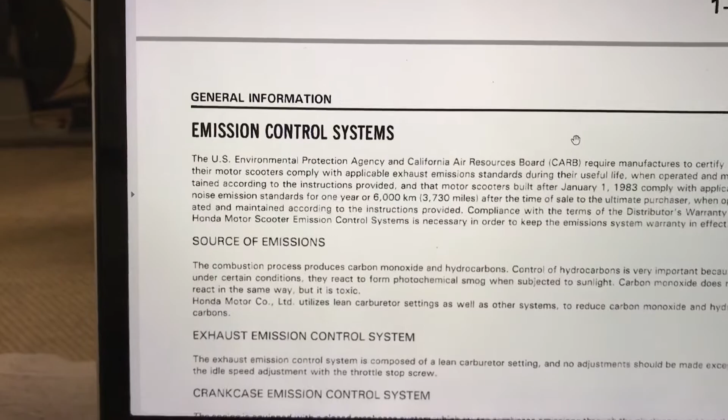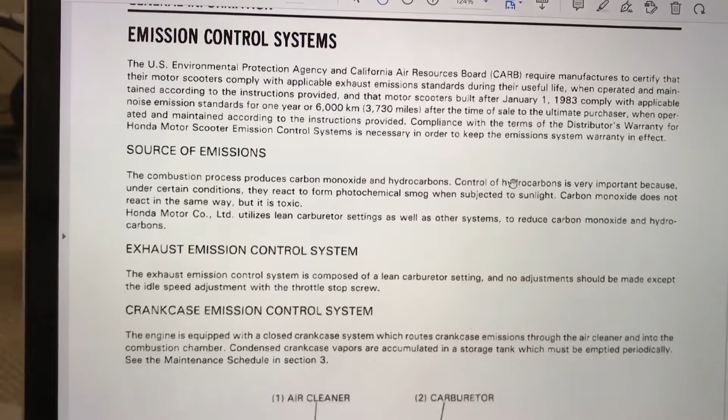This is the service manual. You can Google this, and I was able to get this for free online. CH150 service manual, and I just saved the whole thing because even if you don't know what you're doing, it's good to have. You can always share it with somebody.

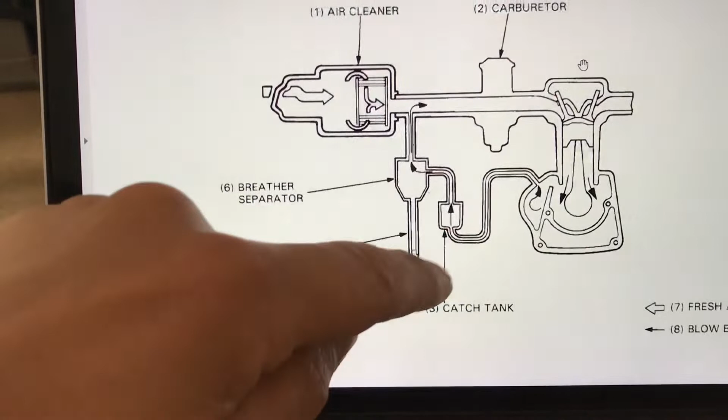So this is basically your system. I don't know if this is going to help, but this is your air cleaner. Goes with your carburetor, your engine, and this maybe is what they're talking about too, this crankcase ventilation. So that's the engine. You have hoses coming out.

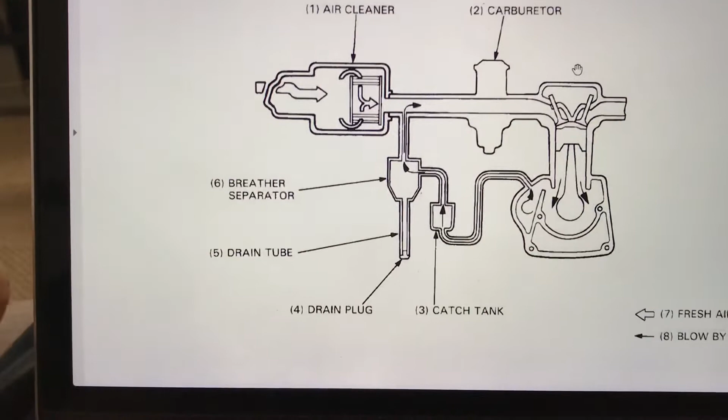It goes to a catch can, which basically separates oil from vapors, and it's recycled back into the engine. This hangs down, this piece here, by the kickstand I believe, and that's a breather separator. That's also separating oil and crankcase ventilation, basically.

It's all emissions, you know, you can't be dumping. Years ago this would go right to the road. In the 30s and 40s, cars just dump oil into the road. So now we gotta recycle that. We can't have any, especially on motorcycles. You don't want anybody crashing.

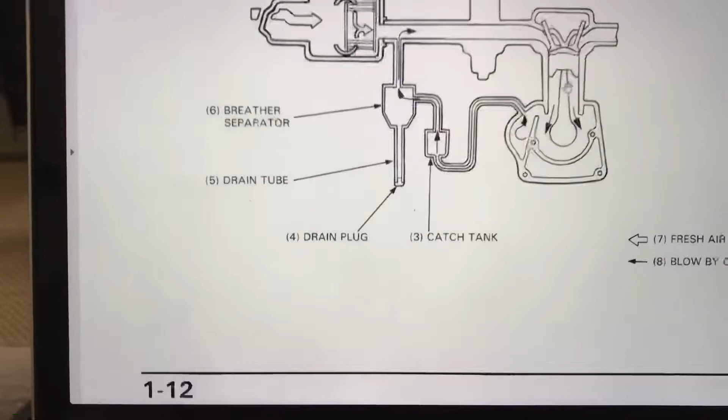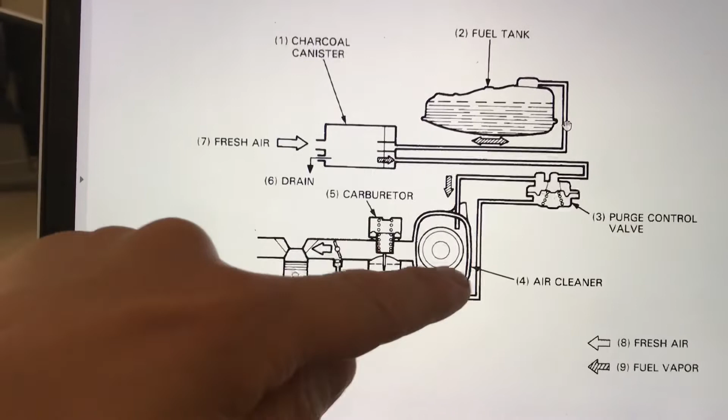So that's probably not what people wanted to know. They wanted to know more about the fuel tank, and we're getting there, bear with me. Carburetor, air cleaner, there's a purge valve, a charcoal canister, and a fuel tank.

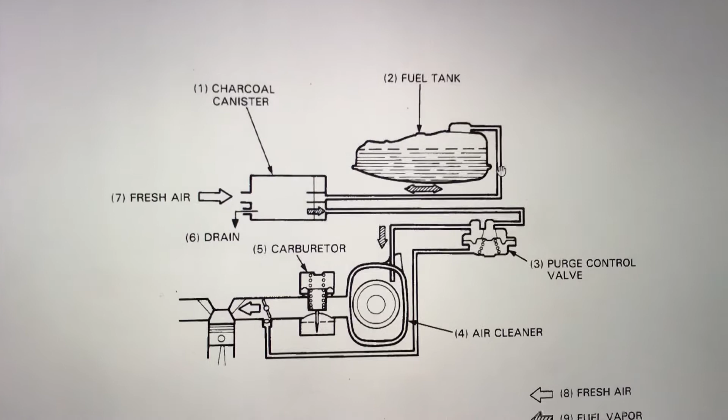Again, this is all for emissions. I think this covers all models, not even everything across the country.

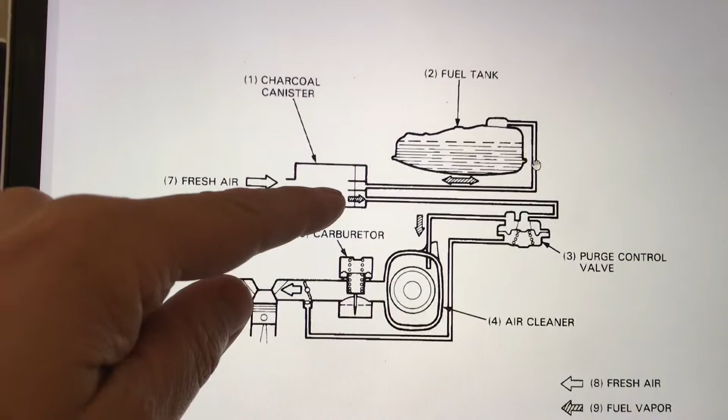Every car has a charcoal canister, and what that does is the top of the tank, fuel vapors come out, go into that charcoal, absorbs fumes. That's the beauty of charcoal, and it is recycled back through this valve, which a purge valve is basically - it opens on demand and it goes back into the engine. So it's basically recycling of vapors and fuel.

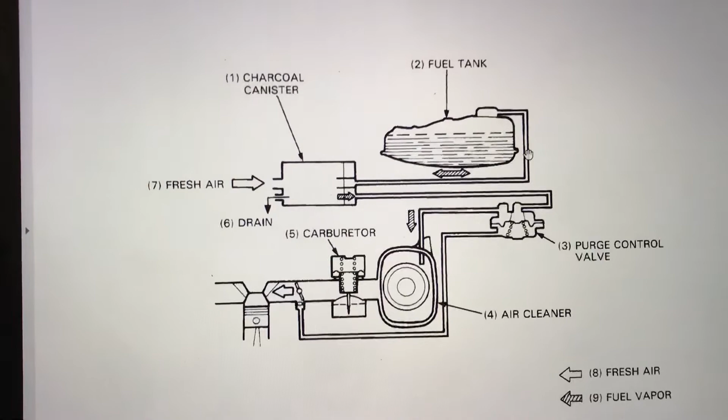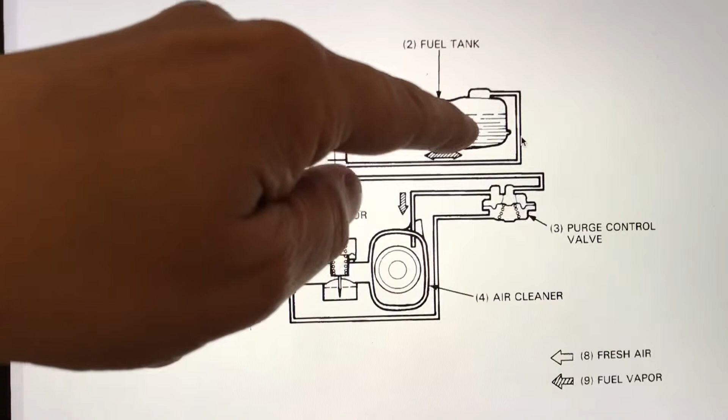And they're showing the engine down here. This also has a drain on it, probably for excessive fuel. I'm guessing that dumps in the street, but it probably never - that's just something's, probably if there's a problem. Regardless, so yeah, purge valve, there's a little valve. I think it's mounted next to the tank, if I remember right.

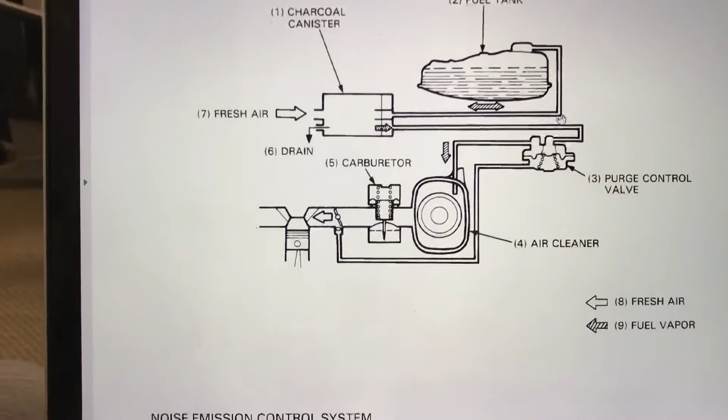And then there's a vacuum hose to that, so the air cleaner, vacuum hose to the air intake. So that's providing vacuum to open that valve. But again, there's nothing off the carburetor yet, which is what people keep asking me. So let's get into California emissions.

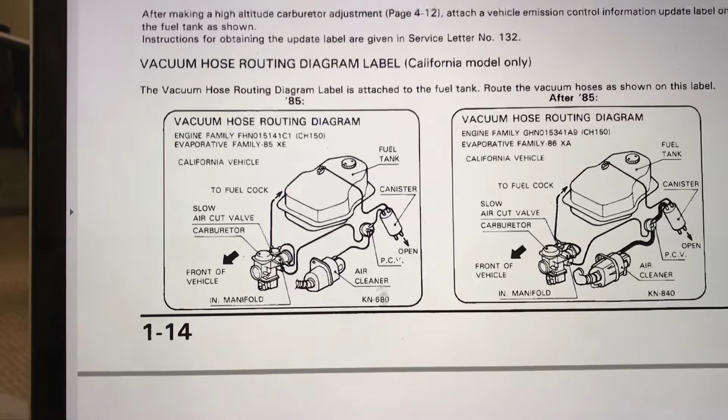Emission label, it's on the gas tank. So here's what I got. I have an '85 and after '85. The only difference I see is they put a big thick PCV hose, and that stands for purge control valve.

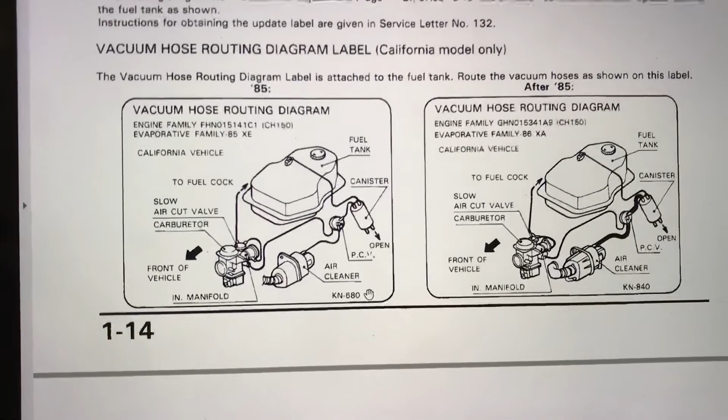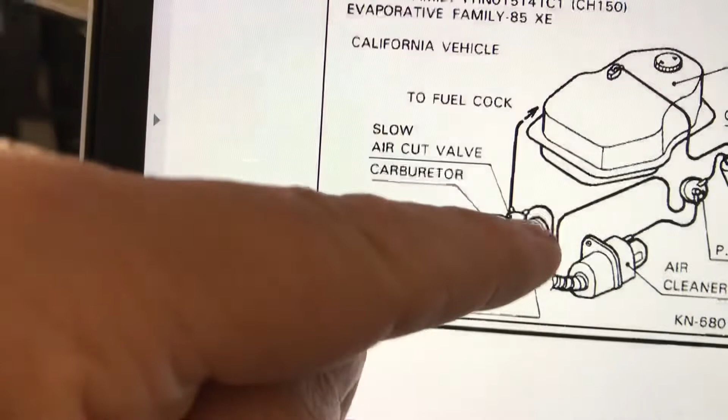So again, emissions. So the only thing I see that confuses people is down here on the carburetor. So you have, this is your inlet, fuel petcock. Again, it's not showing where on the carburetor it goes, but it's on that passenger side because this is the front. And the only other is a vacuum.

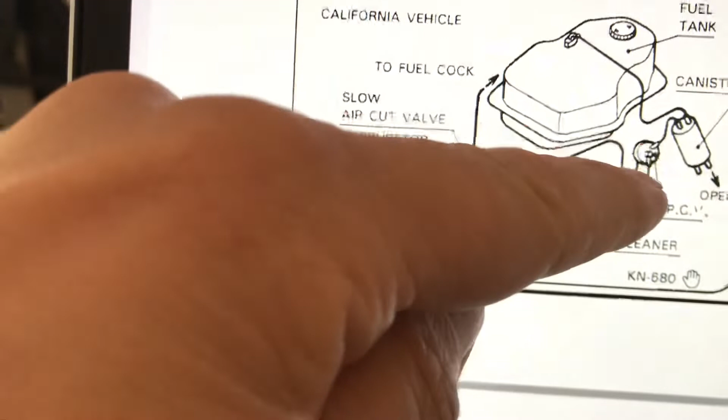Anything that's in a snorkel like that, it's providing suction vacuum. So that's a vacuum to open up that valve. And that's another - that's that PCV, positive crankcase ventilation. Is that the one we looked at in the other picture? That might be the one we were looking at in the other picture.

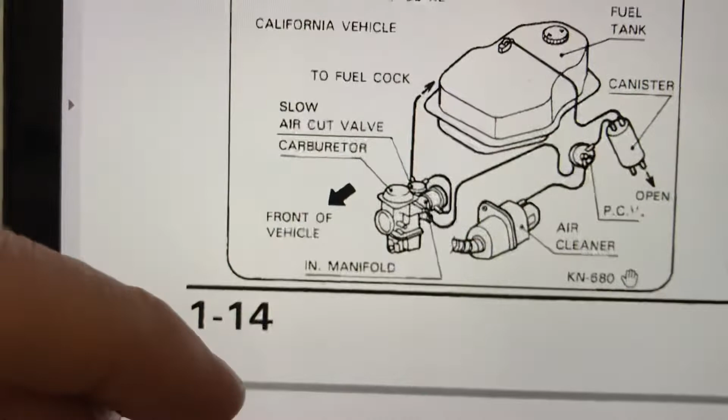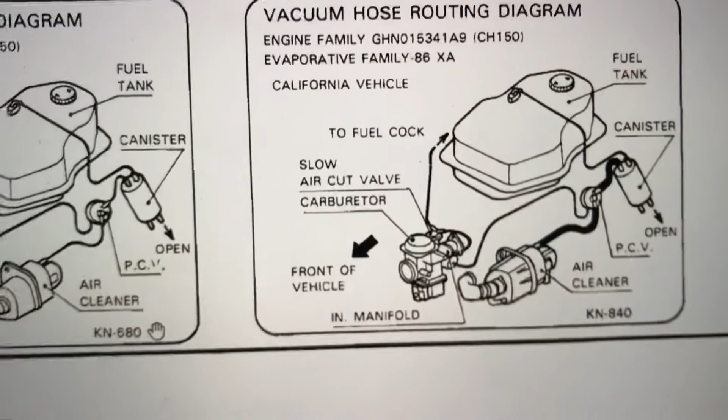And then, so there's only 1, 2 - there might be another vacuum hose. Let's go over to the... Yeah, there may be another vacuum hose without getting out there and looking at it, but...

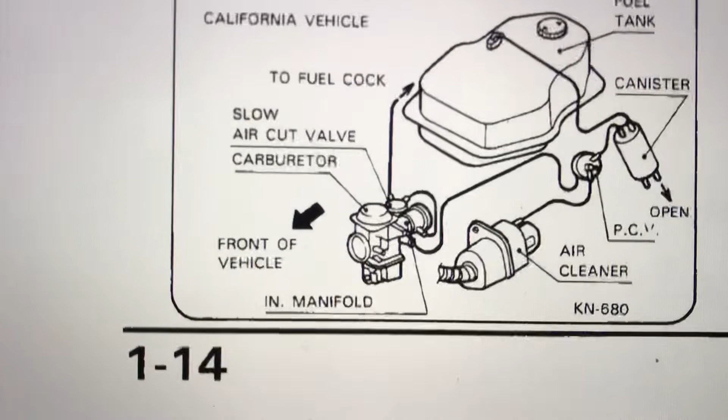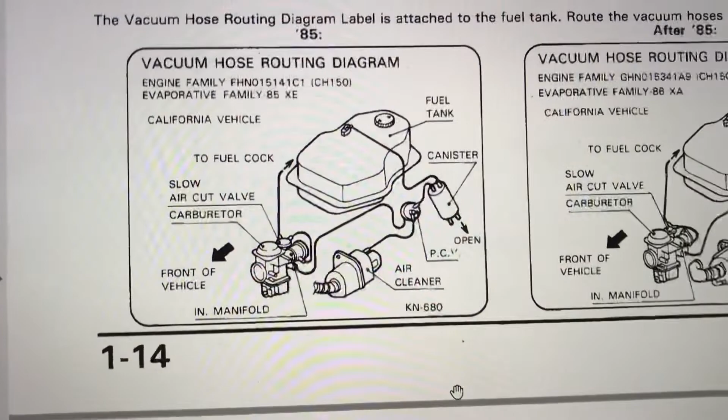That's basically it, really. I'm getting into the oiling system, yeah. So I don't know, you guys keep asking me about all those hoses, and there's not really a lot of hoses on mine. California should have more than anybody else, because I don't think anyone else would have any of this stuff. California's pretty strict on emissions.

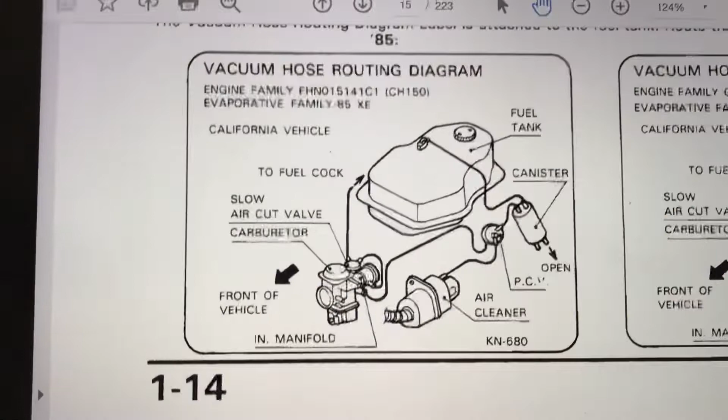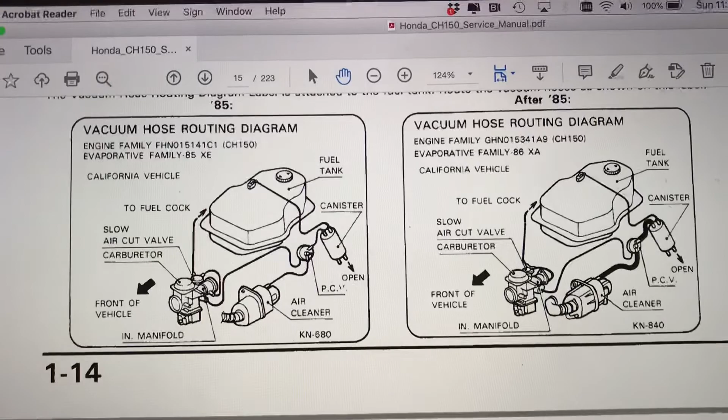What I'm going to do is get all the panels off for you guys, and I've done videos on that, but there's a bolt here, a nut here, a bolt here, a bolt back here, take the bumper off, blah blah blah. I'm going to take off both sides so we can get right in there.

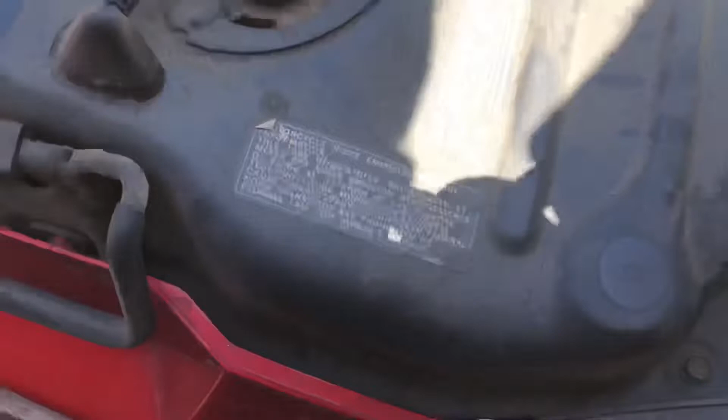I'm guessing mine doesn't say, oh yeah, probably says over here, California emissions. That's all the issues that I think questions are on, because I have all this extra stuff on mine, being California, which is the new norm for everything. Well, I might as well start from scratch, because nobody wants to go back and watch videos.

First screw, right here, bam. Just one with the washer on it. There's 2 Phillips up here. Let me find my screwdriver. One on each side, one here and one on the other side. And that's for this front piece, which, yeah, you do have to take it off. Sometimes I take the seat right off too.

So that's going to be those. Behind here is just clips. You in frame? You're in frame. So let's get back there. This is where I think we only need a Phillips and a regular, really.

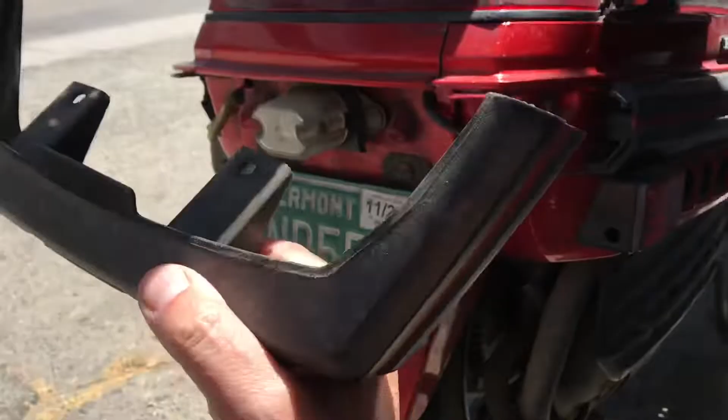Next up is the 2 Phillips, so we can take this bumper off. Then we need to get to a screw here. It pops off. And there's our other screw here.

It's like a 13 millimeter or a flathead screwdriver, I think is what it is. You put you back on the tripod. Alright, and then it should just come off. There's a little clip up underneath there like that. Same with these guys over here, you can see that.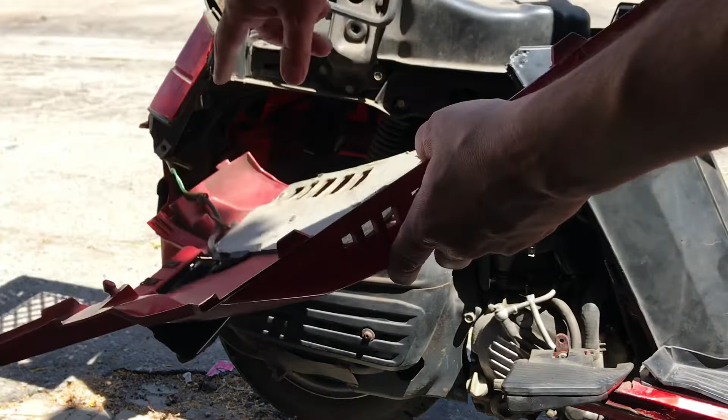Yeah, see, it's just these little tabs that hold it in. Back there you got your tail lights, or your turn signal. There you are, bullet connectors we call those. Okay, red and white. There's a cover.

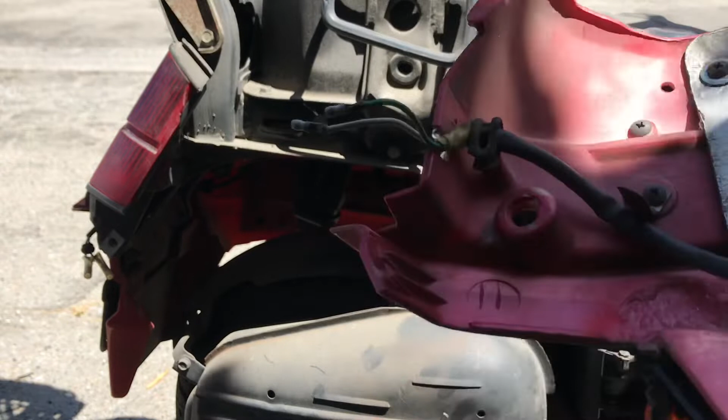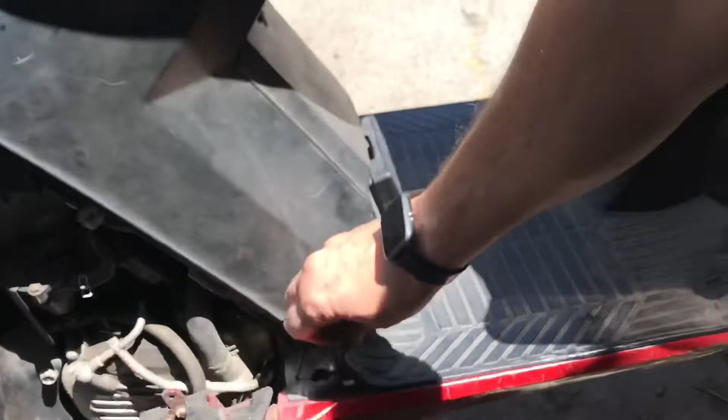We're getting in there to emissions and carburetor stuff, but we're going to get the rest of this off. There are 2 down the bottom here. I don't remember, does that have to come off? Yeah, I guess that 10 millimeter on each side, and that'll take this whole thing off.

Why? Because that's a cup holder. That's the best thing you can buy on Amazon. Get your coffee, not your beer. That would be illegal. I'm going to take these 2 seat bolts out too.

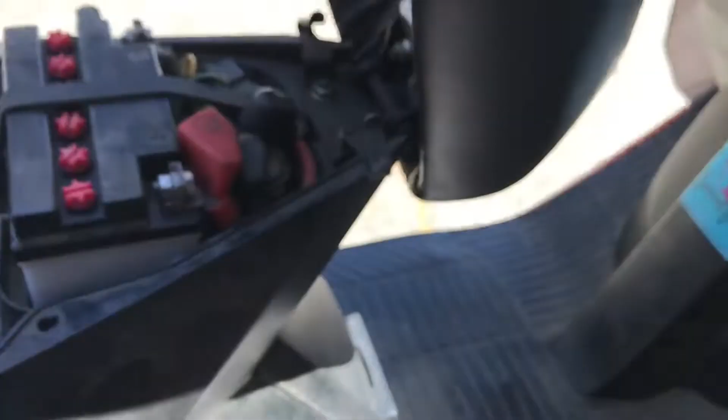Just, like I said, the seat is just in the way. There we go. Now look at all that room, a lot of room we got. Alright, that's going to come up. Off.

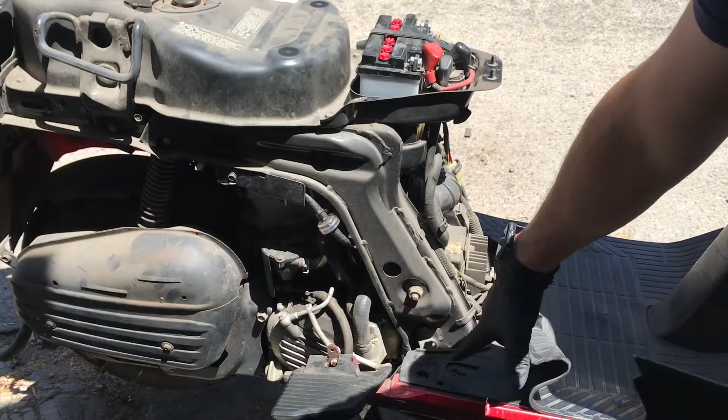Again, there's side panels that hook in there, 2 bolts at the bottom. I don't think that... no, that just curves around and something down there. We're getting there, she's almost stripped. Let's get to the other side.

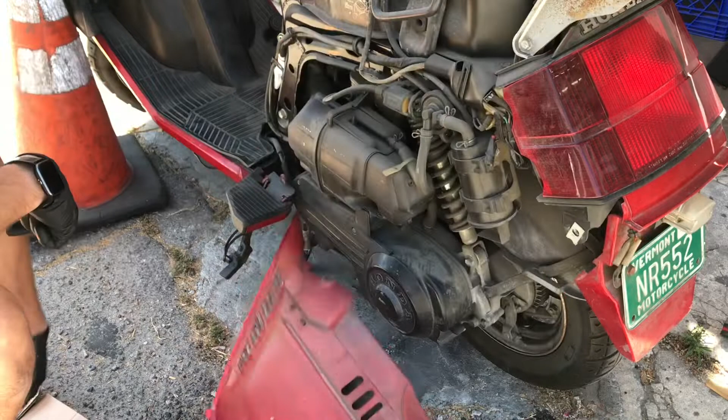And I should reiterate, when I say people always ask me, I mean you guys, and this is great. Thanks for asking about this stuff, because that shows the information is not out there, and I can gladly provide it. Because that's what the world should be about, sharing information. Google will tell you that, I think they share everything. Steal it, don't do that. Not till these break.

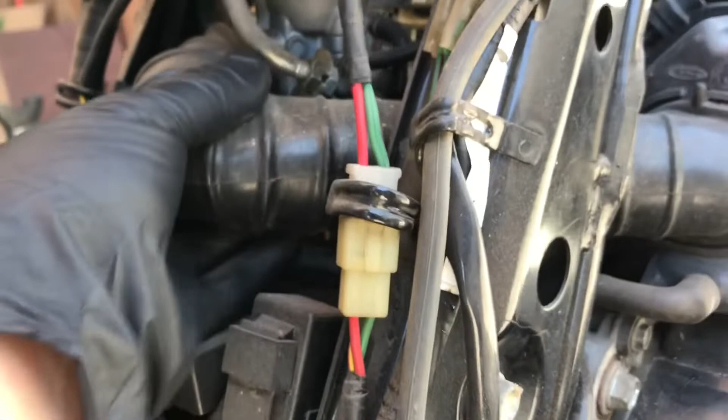Alright, she's looking stripped, right? Yeah, I mean that. Thanks guys, thanks for asking questions. And you know, I'm on my own time here providing this. I'm not getting paid, but that's what I'm here for. Aren't we all? So I guess, yeah, if you were a

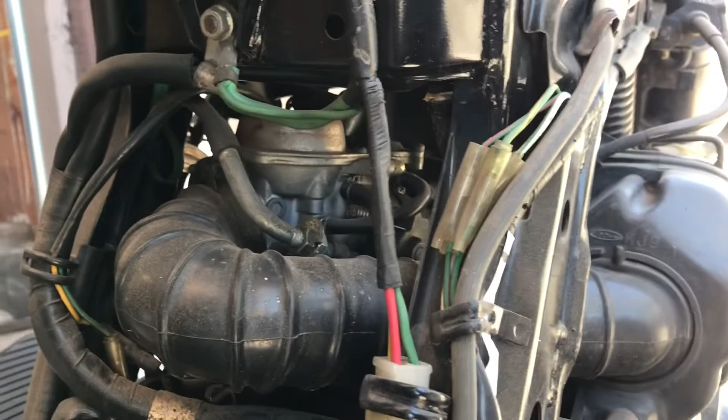novice, you would look in here and see all these hoses and say, what is all this crap? That is a good point. I'm going to take this off. That's our inlet. I'm going to really get in here. I want to really show you what we're looking at.

If you're going to own a scooter or carburetor, you really do need to know how to clean carburetors, because they always get dirty. The reason they always get dirty is because people leave gas in them. The worst thing you can do is leave gas in a carburetor, or not run it, you know, store it for the winter. You got to empty it. You can use fuel stabilizer, that stuff works great. But yeah, that's the biggest issue that happens with these things. And cars too, I mean, you gotta store things properly.

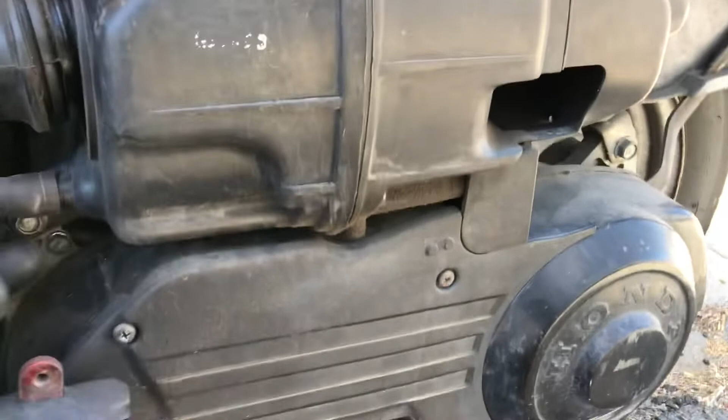Alright, so that's our air intake coming from our air box here. It's got a hose on the bottom. Another little breather hose, we'll call it. What's it do?

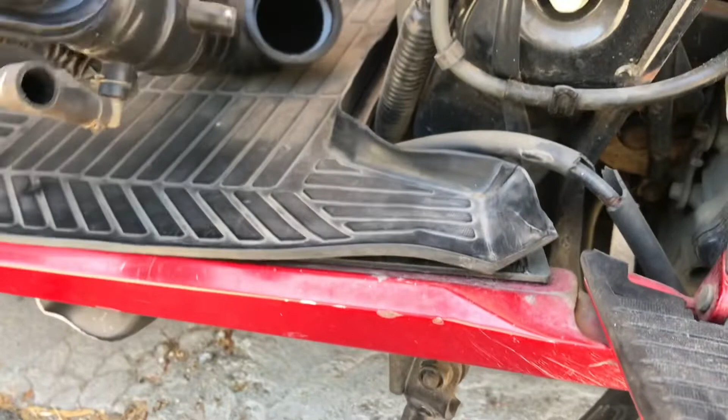What are we doing? That's just a separate thing, that might be for any fuel or oil to drain back and be recycled through the air box, because it's at the lowest point. That's the only thing that would make sense because there's no vacuum to it. I mean, there's a vacuum, there's a suction going into the engine. But anywho, all right, let's get in here a little bit.

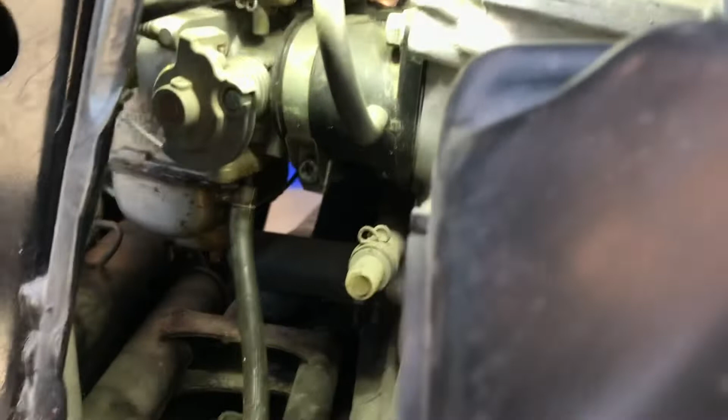Let's see if I can get some light. I'm gonna zoom out here because we're on the left-hand side, we call driver's side. First thing I see is this was part of our air hose, that thing we just took off, so you don't have to worry about that. That was there. See if I get this lens in there.

First thing I see is I'm missing a hose. You may see down here - yeah, this is my bowl drain. There's usually a hose that goes straight down, you'll probably see it hang down underneath your scooter. That's just like a drain if your float sticks or something is an issue in the carburetor. Fuel will flow out of there, or when you're servicing it, you drain the bowl.

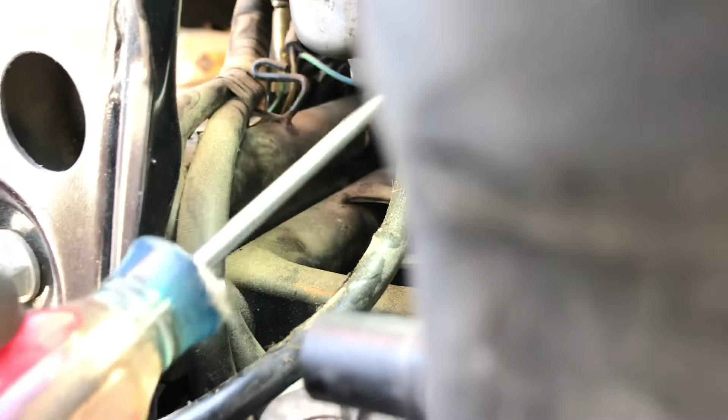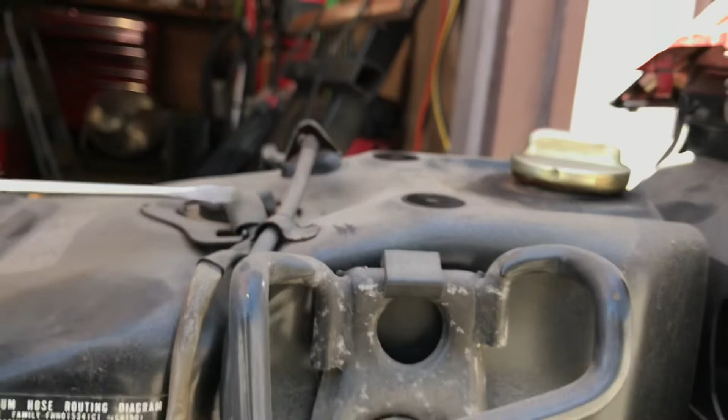Alright, and then off of that purge valve you get some lines. This line going up to that fuel tank, this is your fuel sending unit, that's electrical. So one line, that was that one we just showed, okay, make sense? And then you got this, not in the lens, this loop hose here that goes from intake, so that's providing vacuum, because there's anything in an intake like that, it's providing vacuum.

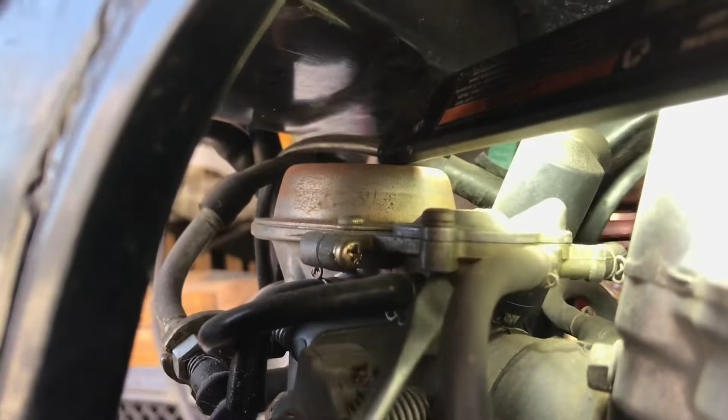And it's going up to where my light is. No way, where's the lens on it? There we go, it's going up, sorry, it's going up to this diaphragm on the carburetor. So that's just a loop, you don't even have to worry about it. I mean, make sure the hose is in good shape.

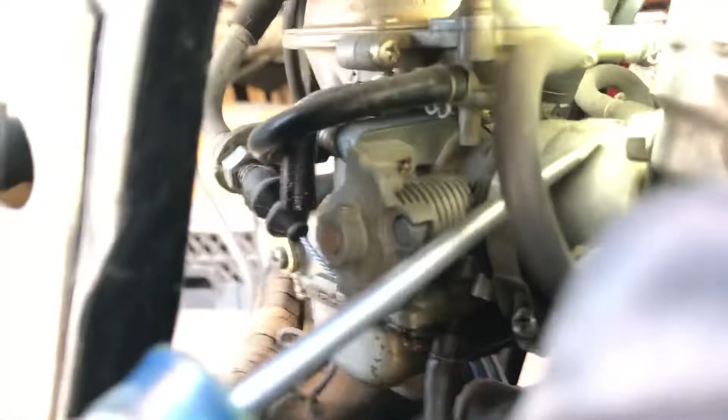These crack too, these hoses here, that'll give you lots of drivability issues. But those are available online, aftermarket. Check your eBay sources. And then we come over our front.

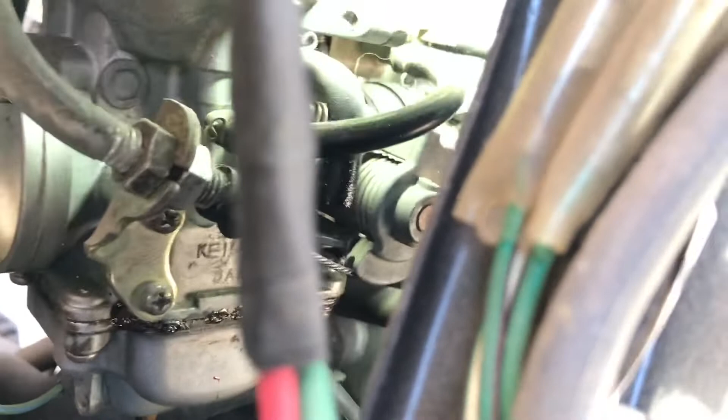Throttle cable coming in. There's another one of those roundy round hoses going to the carburetor. Looks like it's going to the closest one. Let me get the light back in there for you guys. Come on, camera lens, get in there. Ah, there we go. Yeah, right here, right in front of, so right top of the throttle adjustment screw, right there.

That's your idle. And then right behind that idle screw is a little hose. It just dumps out too, that's a vent, so it needs a vent air. Everything needs a vent, anything mechanical that does anything needs a vent. There's your intake of your carburetor, and this is your bowl gasket.

That's mine was leaking, you can see the gasket I didn't have, so I used a liquid. Seems to be holding up just fine. And that's the bottom of your bowl. There's a screw there to drain it, and it'll come out that thing I was telling you about earlier.

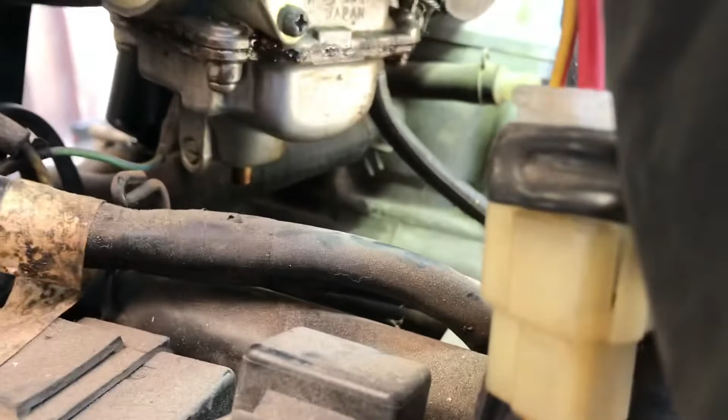All right, let's get on the other side. All right, over to the old passenger side, we're going to call it, even though this is no passenger, this is a motorcycle or a scooter.

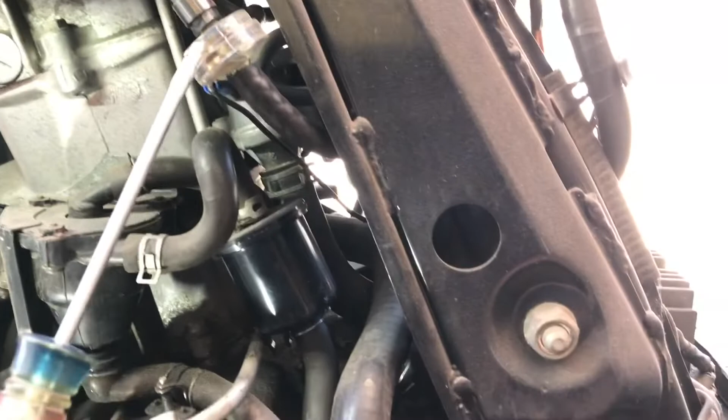So underneath here, my other video, I just did a fuel filter. So the petcock is under here, comes in, put this inline fuel filter, comes down, and I lost it in the lens - there it is. It goes into your carburetor right here.

Okay, come around for you folks. It's the biggest hose because that's your feed. And think about it, see where it's going? It's going to the bowl. Where's the bowl? Bowl's just a little mini fuel tank. So from your fuel tank, you gotta fill that bowl. I'll show you another analogy of a carburetor here in a minute.

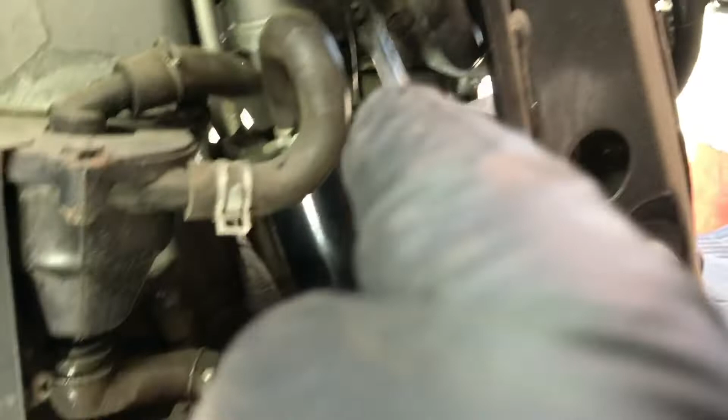Okay, so that out of the way, there is another vacuum doohickey up here, it looks like. It's another one of those circle, U-shaped hoses. It goes from one part of the carb to another part of the carb. And it's this valve here, which has an electrical connector to it.

That's part of the engine though. Is that what it's going to? So that, it's obviously feeding vacuum to this is what it's doing. So that hose is like providing vacuum to this device, which is probably part of my emissions dumping. So it might be a temp gauge actually for the engine temperature.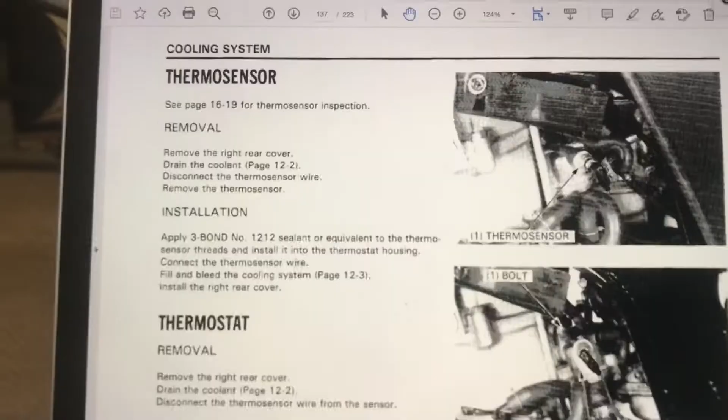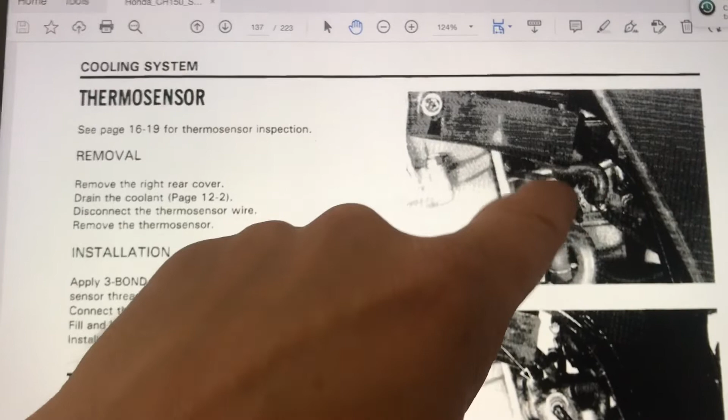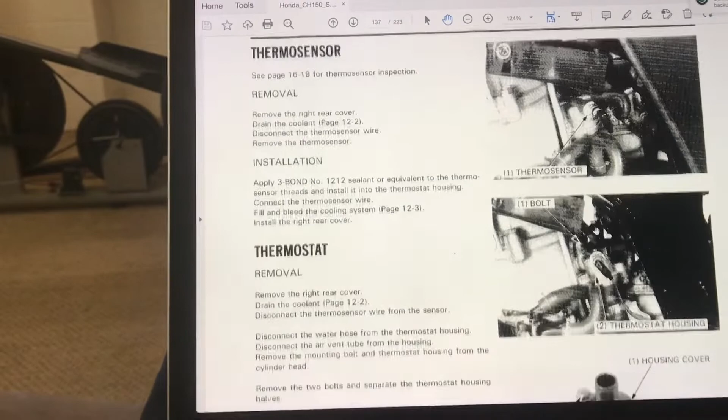I forgot, those are cooling lines. Somebody mentioned coolant lines go through the carburetor. It was funny, when I was out there I didn't see them, but now it makes sense. That's a thermosensor wire we're talking about. Coolant comes out of the thermostat housing, goes through the carburetor, and probably out that other hose, for warming up the carburetor to get it up to temperature. So two of those lines I was saying were vacuum are actually coolant.

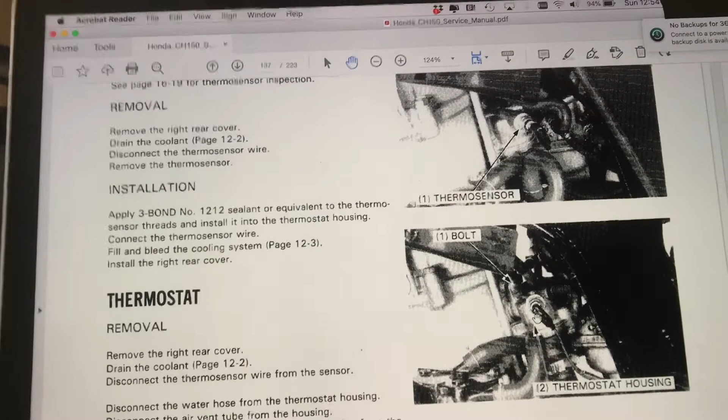Okay, not to sound like an idiot, but I checked myself, not 100% right now, but let's see. What else are we looking at? Oh, it got really dark.

This hose again is part of that crankcase breather setup. The engine's mechanical, it's pumping oil, making pressure. You need to vent that pressure, and that's going to be part of that.

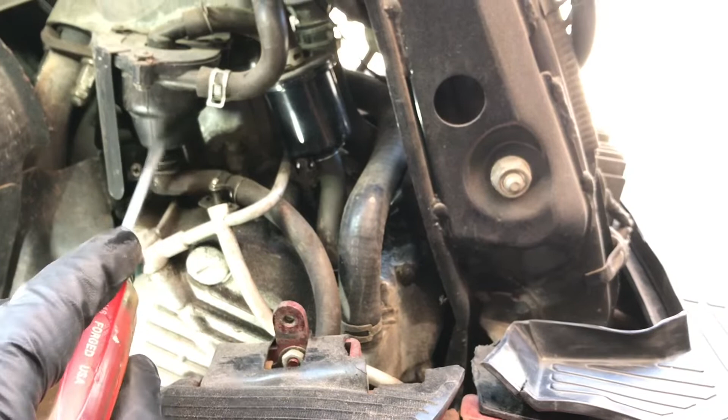This is emissions stuff too, another dump. This is part of that oil separator. If I unscrew that, a little bit of oil probably will drip out. The idea is this is the separator, separating liquid oil from vapors, and it settles here. This is a separator part as well.

The idea is you don't want to dump it in the street, so they recycle it back into the engine. It's probably pressure coming out, and this one's vacuum going back into the engine, or no, that's the one going to the airbox. So all that pressure building up, oil pressure, anything extra goes back into the intake. That intake snorkel had that too, then it goes right back into the engine. So again, all emissions components.

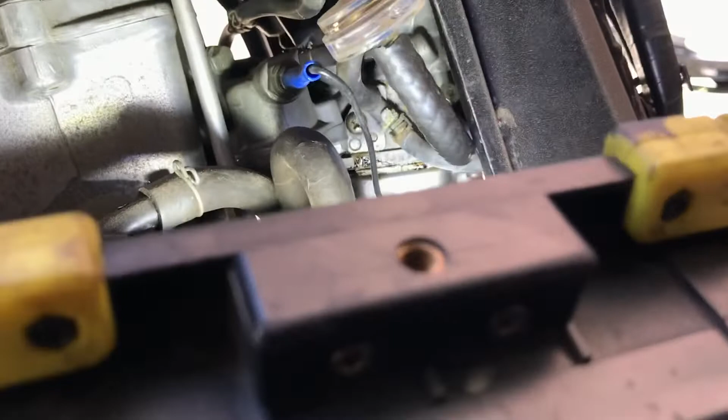Let's see if I'm missing anything. I hope this is helping somebody, it's hard to do all this without taking the whole thing apart.

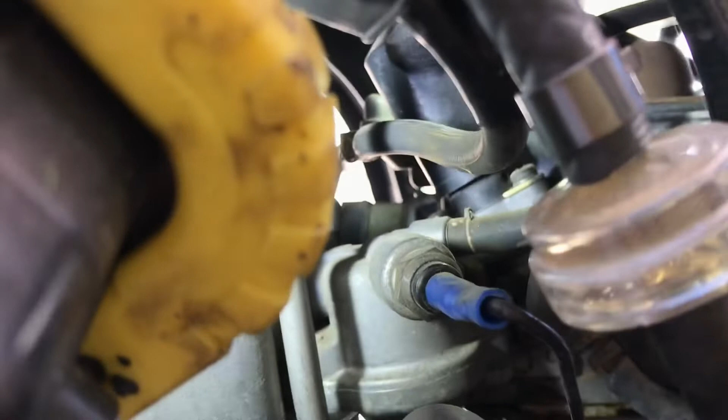Above your fuel is this vacuum line, that might be a question too. That's a vacuum, it goes to the carburetor. There's a T in there, if you can see where it goes, it goes right there. It's that little diaphragm on top, I think we were looking at that on the side of the carburetor, but that's your vacuum.

What it is, this petcock, fuel petcock, will not flow fuel. It stops when the engine's off. As soon as the engine's cranking and vacuum starts, that's when it flows fuel. So that's a nice safety feature, and that vacuum is for that.

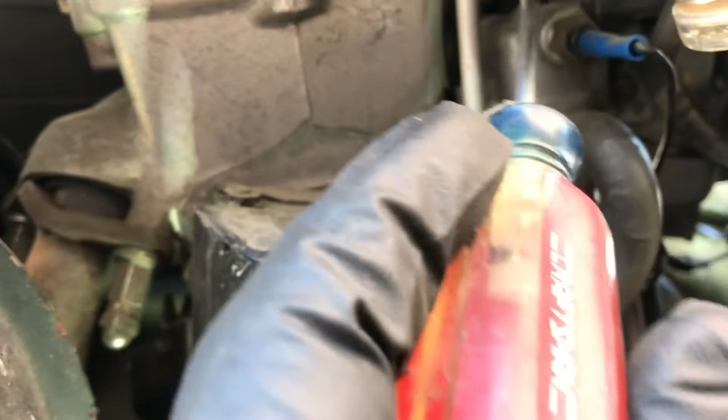There's two hoses in there, one goes there and one's that other, we were on the other side. It's that loop, but you'll see it, there's a little diaphragm there.

Another thing is, I guess that electric, that's your choke basically, that electrical - let's see if I can get this. This big electric thing that sticks in your carburetor, that's your choke. It's a high idle, that's how your high idle is achieved. It applies power to it, and as it warms up, you'll notice your idle comes down.

Those you can buy, they're replaceable. I've done one on this, it's pretty common to fail, I think. So that's something you can buy.

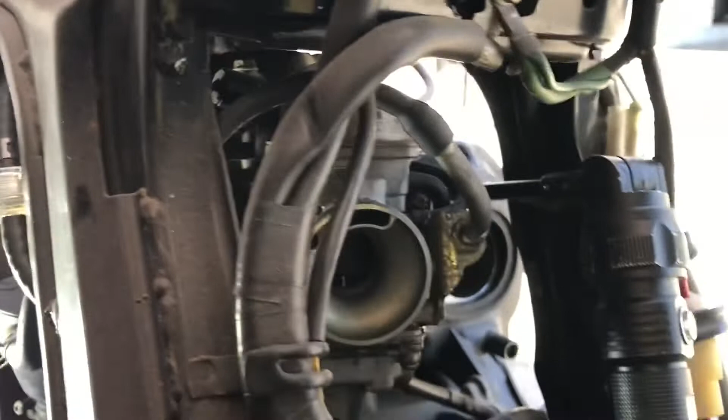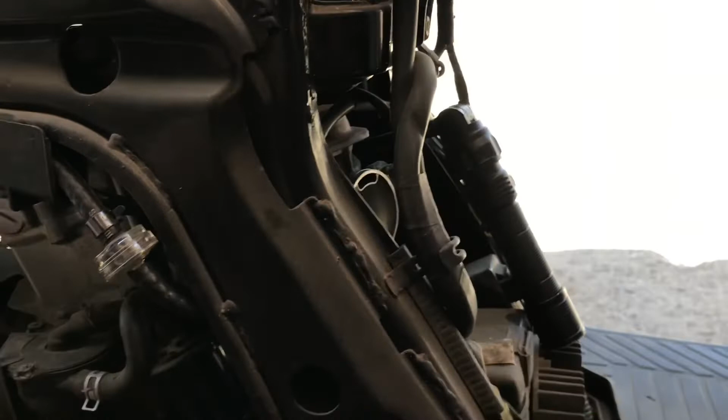What else? I think that covers all the hoses people were concerned about. A lot of them are just vents and circling back to this, that - they're all doohickeys, they're doing things. But if you don't have California emissions, you probably don't have this stuff. Maybe they would even have this, but maybe not the other stuff on the other side.

Let me show you inside how a carburetor works. Will it run? That's always a big question, isn't it? Oh, have to turn the switch on.

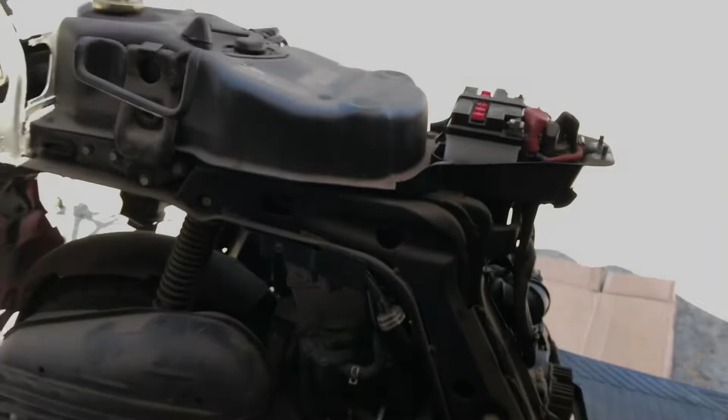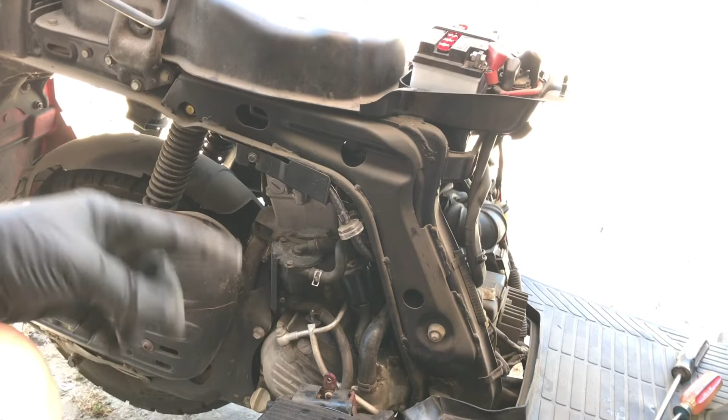And the idle comes down. There it is, that's that electric choke thing I was talking about. Once that turns off, the idle comes down. My idle might be a little low.

But yeah, there you go. Last but not least, this is your final carburetor lesson. This is a carburetor. Your air intake is here, your fuel bowl is here. You mix the two together, flush it into the engine.

You'll never look at a toilet the same. It's the same principle, air and water mixed into the drain in this situation, but in your engine it's air and fuel mixed, flushed, for layman's terms, into the engine. It's actually atomized into mist and so on. Maybe I should title this 'You'll Never Sit on the Throne Again' and think of it as a toilet.